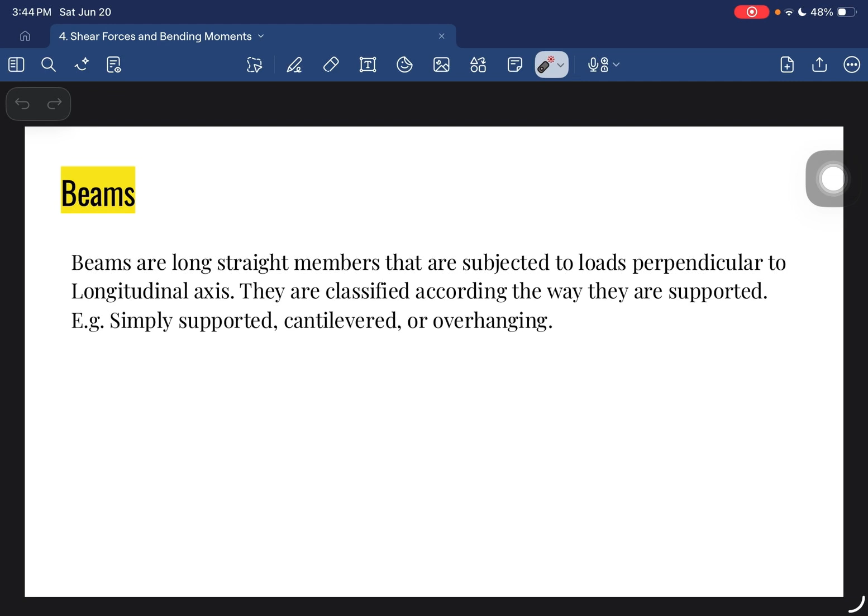So before we proceed, let's define some important terms. First is the beams. Beams are long straight members that are subjected to loads perpendicular to the longitudinal axis. They are classified according to the way they are supported, such as simply supported, cantilevered, or overhanging. So, a beam is a structural member that carries loads acting perpendicular to its longitudinal axis.

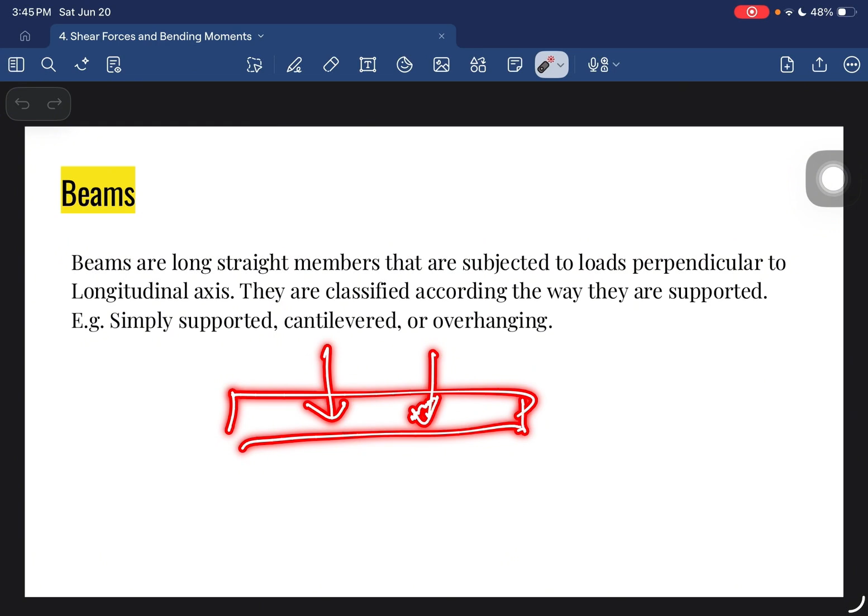Next is the shear force. It is the net unbalanced vertical force acting at the exploratory section of the left or right section of the beam.

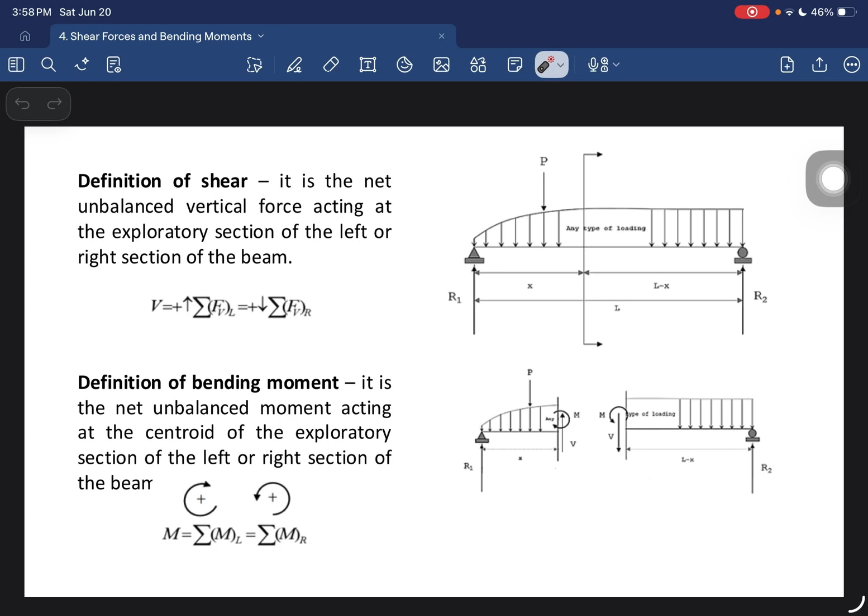Okay, so we have two methods in drawing shear and moment diagrams. First is by establishing shear and moment equations. Shear and moment equations are developed by passing exploratory sections at distance x from the left support at points of loading changes. Usually, the left support is taken as the origin 0, 0.

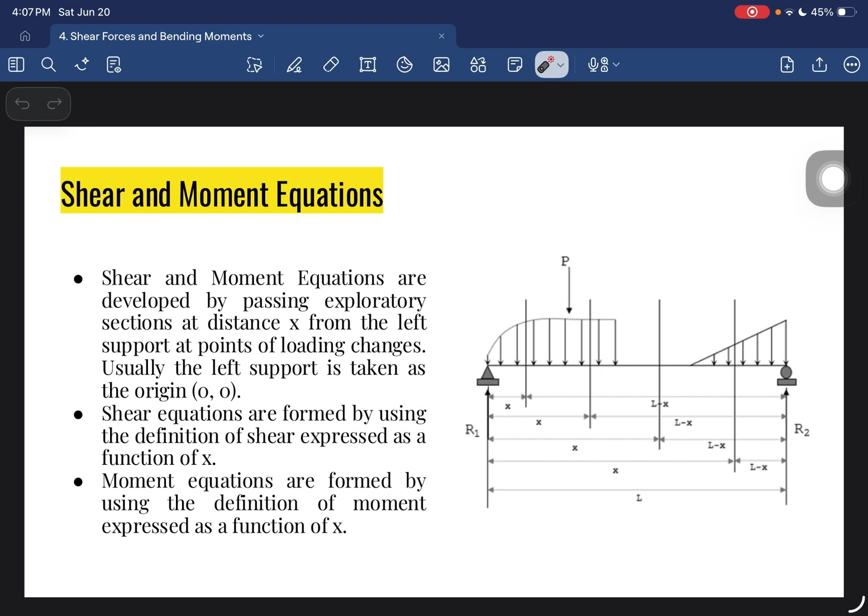Then, sa moment equation naman, na-form siya by using the definition of moment expressed as a function of x. So, to avoid confusion, class, gumagamit tayo ng sign convention. For positive shear force, the internal shear tends to rotate the beam segment clockwise. So, ito ding section, yung internal shear force niya, nagro-rotate clockwise. So, hence, it's a positive shear force.

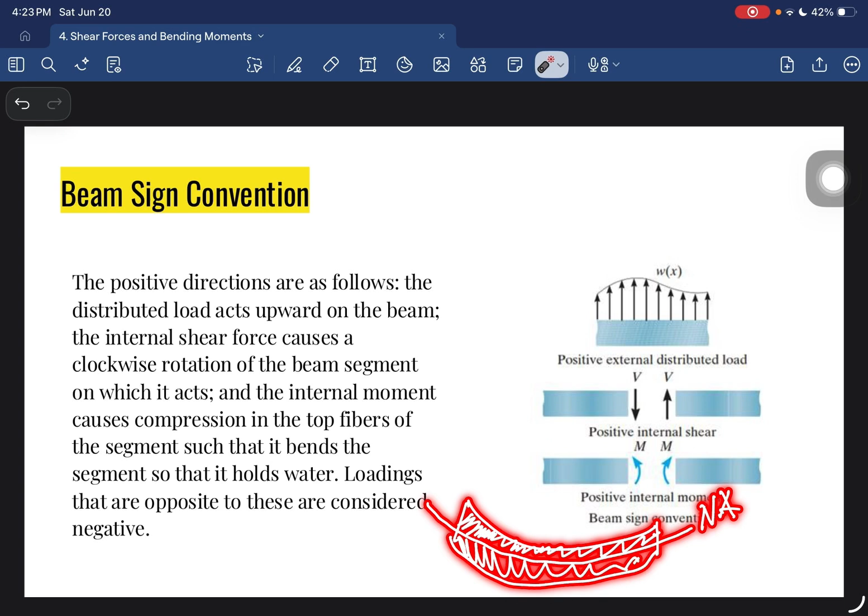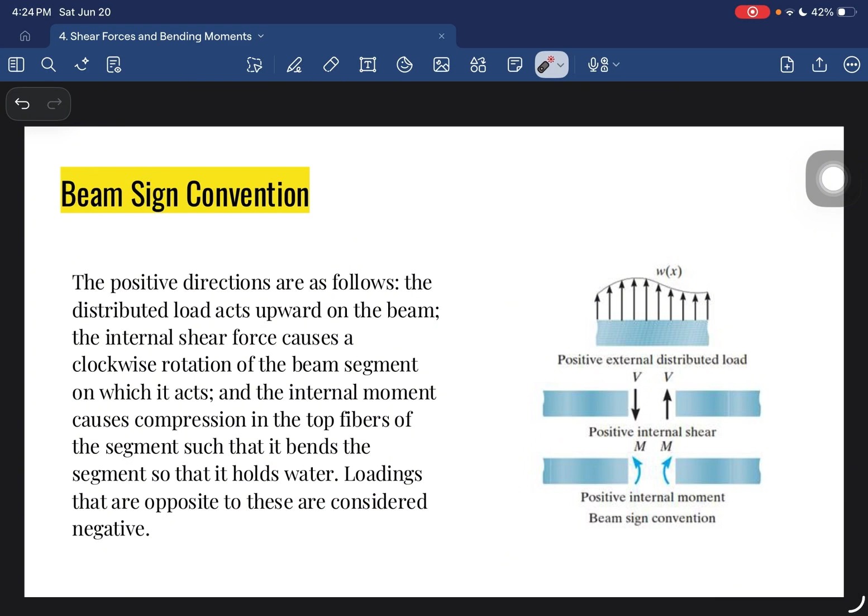So, a simple way to remember this is that a positive bending moment creates a happy face. Then, pag negative moment naman, sad face. So, loadings that are opposite to this are considered negative. So, kung ganito yung internal shear force niya, counterclockwise na to, hence, this is a negative shear force.

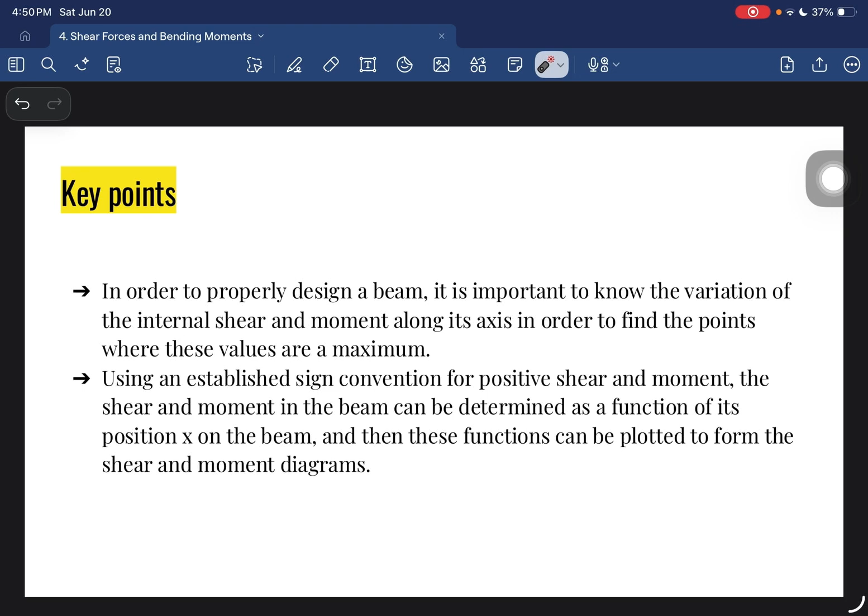Since nagbabago po ang shear force at bending moment sa iba't ibang location ng beam, gumagamit tayo ng shear and moment diagram. Then, shear and moment diagrams are just visualization of the shear and moment equations plotted on the Vx axis and Mx axis.

The discontinuities in the shear diagram are joined by vertical lines drawn up or down to represent abrupt change in shear. The point of zero shear corresponds to the point of maximum moment. So, one important relationship to remember, class, is that the maximum bending moment usually occurs where the shear force is 0.